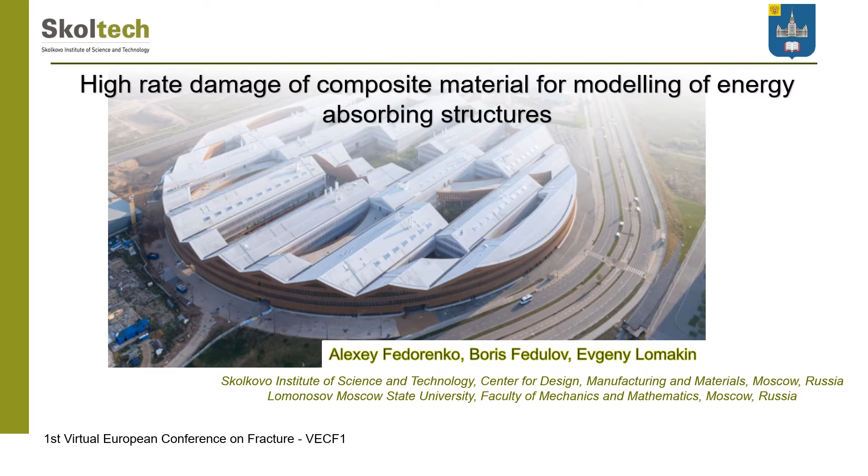It is about high rate damage modeling in composite material. Here is the content of my presentation. First, I start with a brief introduction to examples of composite structures which serve as energy absorbing components in different industrial applications.

Then, since modeling of the crush process is in the focus of this work, a damage model for the case of quasi-static loading will be proposed at first, and then it will be extended to the case of strain rate sensitivity. Then numerical simulation examples of composite tube crushing will be provided. After that, a short section of results, discussion, and conclusion.

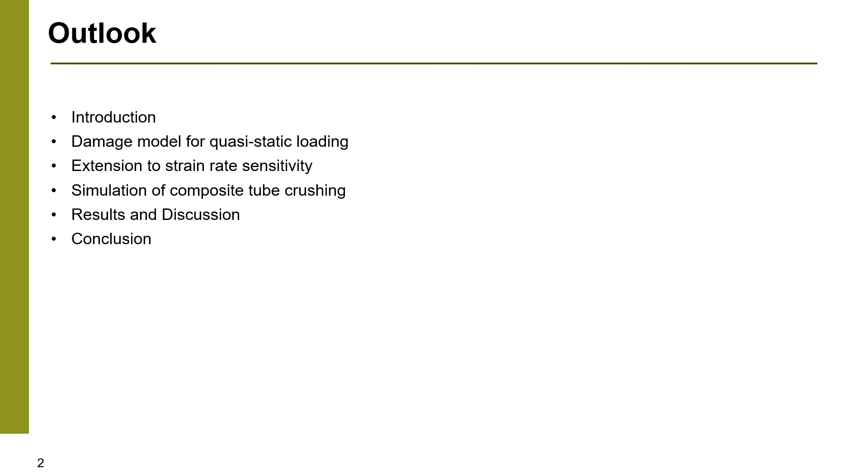First example is a crash tube in the safety system of the seat in a helicopter or airplane, which is aimed during crashing to absorb energy and to reduce overload to the person on the seat. Another example is a special structural element between the cargo crossbeam and lower frame of the airplane with the same goal to reduce overload in case of emergency landing.

Here is a Formula 3 composite nose. This is the entire structure which absorbs energy during collision and also reduces overload to the pilot. To characterize dynamical properties of the material, a special test should be conducted. Here is an example of tubular specimens which are frequently used for material rate characterization.

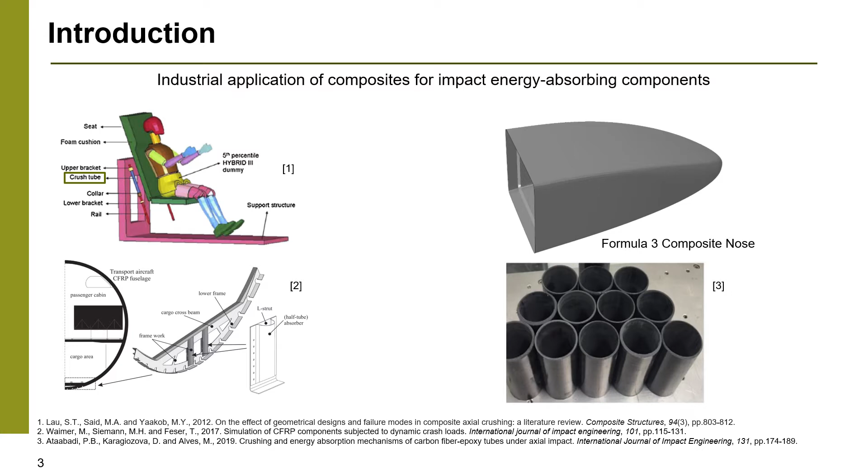Here is a typical experimental setup for strain rate characterization of composite material. It's based on a tubular specimen subjected to impact of a falling mass or fixed to that falling mass. The specimen has a chamfered end, which is important for correct failure initiation. The general characteristics obtained from this test are specific energy absorption, with the meaning of force averaged over crushing distance, and another characteristic is specific crushing stress.

A typical load displacement diagram is presented on the right, so you can estimate the importance of the end chamfer of the specimen. In case of a flat square end without chamfer, the response of the specimen is very stiff, and failure may occur far from the contact with the mass, so the crushing process is not appropriate. Main parameters which we can vary are impact velocities, layup, and chamfer geometry.

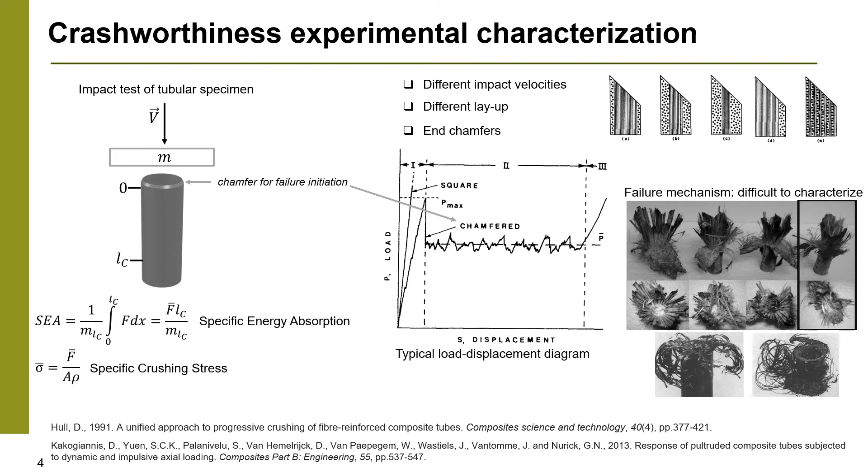Failure mechanism is difficult to characterize, as you can see on these pictures, but some key patterns can be detected, such as cracks, fiber deployment, or crushing to debris of small pieces. A tubular specimen may be considered a structural element. So on the lower level of coupons, a very popular impact experiment is based on the split Hopkinson pressure bar. It records reflected and transmitted strain waves, so strain in the specimen can be determined.

As you can see on the example of test results, transverse and shear loading diagrams are highly nonlinear and rate dependent. They have a significant hardening with rate growth. In fiber direction, the hardening effect is not so meaningful, but ultimate strength growth with impact rate exists. Also, from literature sources, we can conclude that tension properties are not so sensitive to strain rates, so they can be omitted in the analysis.

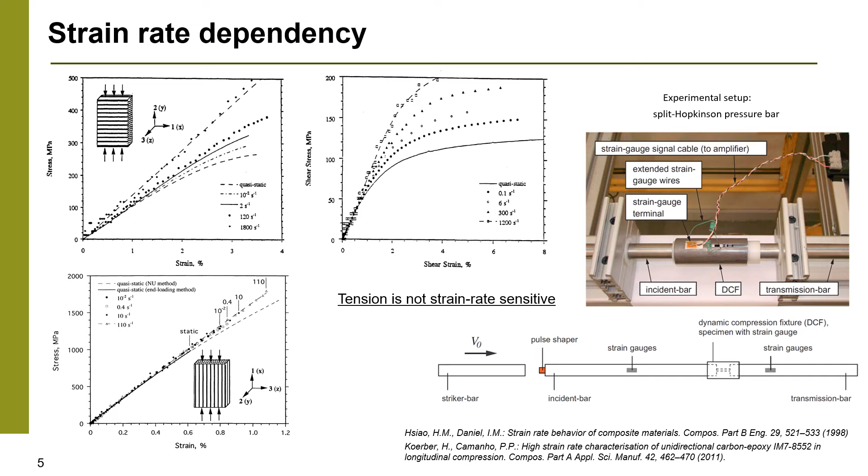This work proposes a model of composite material damage and failure. It's based on the continuum damage mechanics concept. We introduced two damage parameters. Psi1 is associated with fiber failure and Psi2 with matrix failure mode. Damage parameters can be considered as multipliers to elastic constants, and can be interpreted as a degree of material stiffness reduction during damage accumulation.

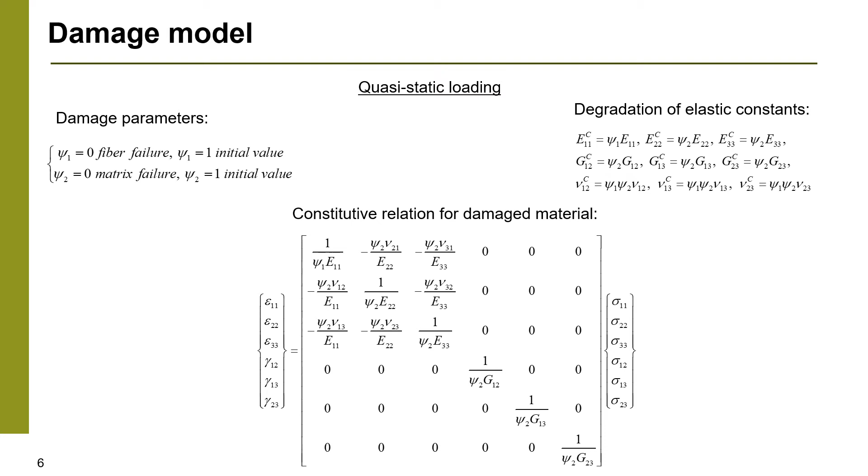Maximum stress failure initiation criterion is chosen for simplicity, and on these diagrams you can see assumptions for the damage constitutive law. For longitudinal load, we reach ultimate stress at point 1 in case of load increase. Then the load suddenly drops down to zero value, which corresponds to failure strain. But in case of unloading at point 2, we reach back to point 3.

Slightly another assumption for transversal load and shear load. So at first we get some stress value at point 1 where damage growth initiates, and then we have a nonlinear part of load, reaching some constant value, and in case of unload we go back to the 0 point.

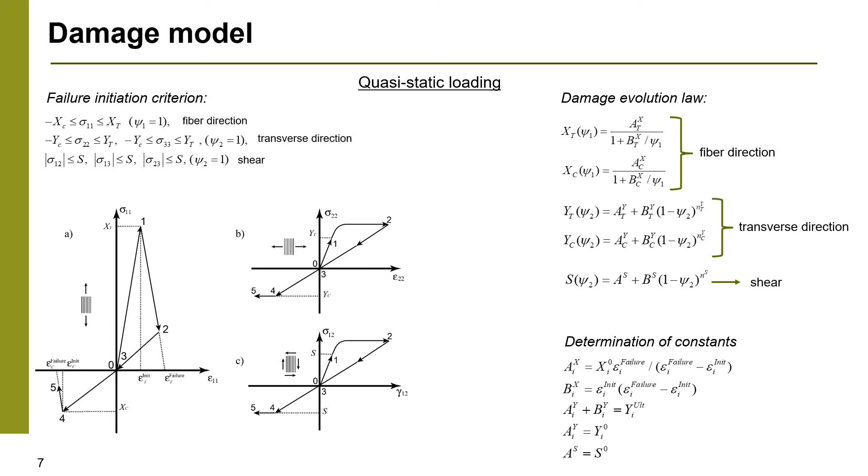To realize this idea, a damage evolution law based on strength dependency on damage parameters is presented, and constants can be easily determined based on strain and stress limit values.

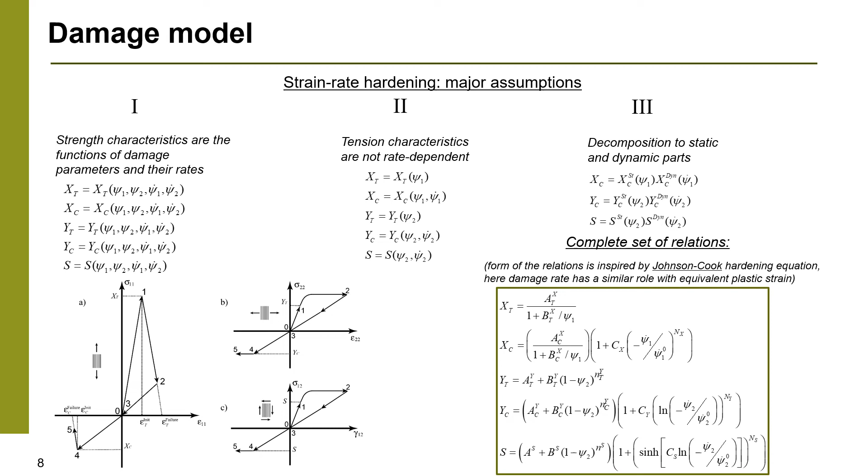Next problem is parameter identification, and it can be resolved using stress-strain diagrams for a set of strain rates. For a particular strain rate, we can write the following equation, which can be transformed to an ordinary differential equation with initial condition of undamaged material, and then we make an initial guess of the parameters, solve the differential equation, and compare with the test curve. If the fit is not satisfying, we vary parameters. So a special procedure is developed in case we need to improve the fit.

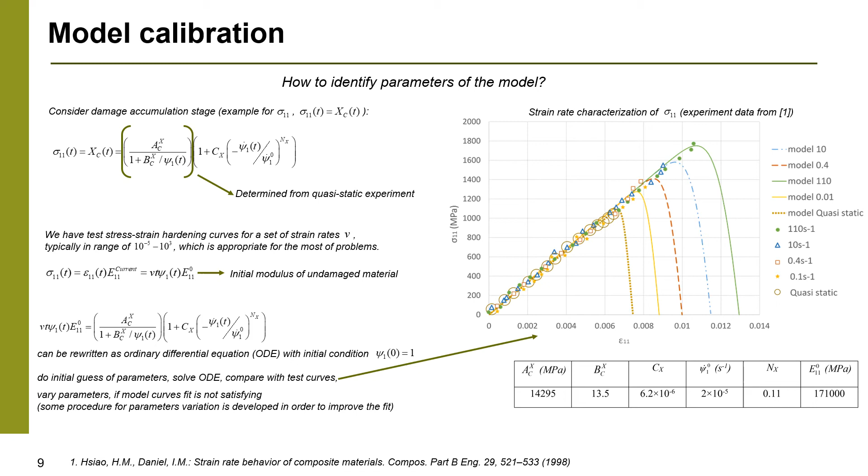On this slide, you can see the procedure of parameter identification for the other two stress components, second and shear stress components, and identified parameters based on solved differential equations.

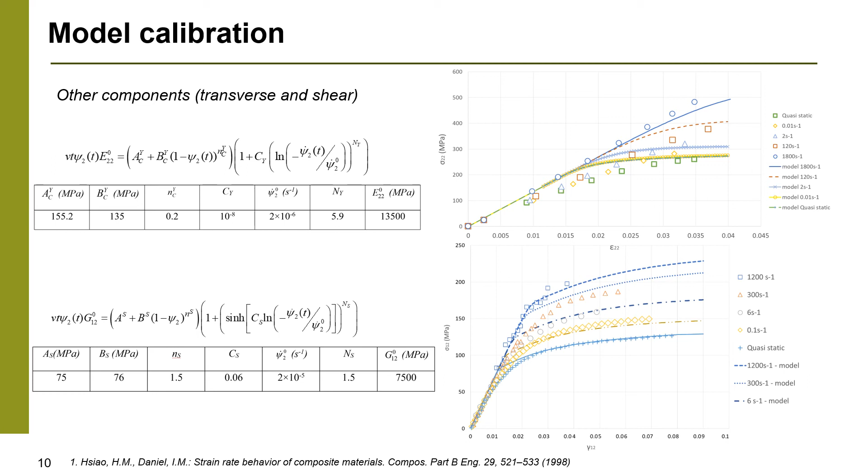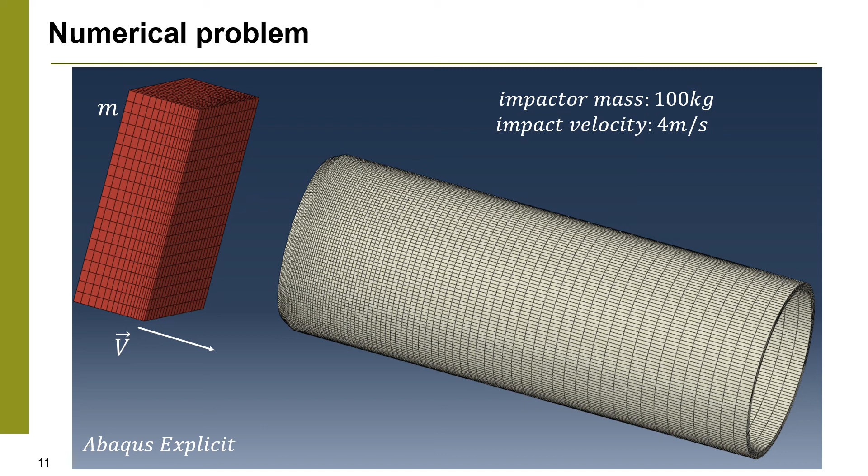Now we consider the problem of numerical simulation of impact to a typical tubular specimen on the basis of the developed material model. It was accomplished with Abaqus Explicit software with an implemented subroutine. Here are elastic properties for the selected problem, the dimensions of the composite tube, and the chamfer zone is selected to be 30 degrees. We use 0 degrees orientation in axial direction and 90 degrees in hoop direction, as shown in the figure. So the ratio between axial and hoop fibers is 1:3.

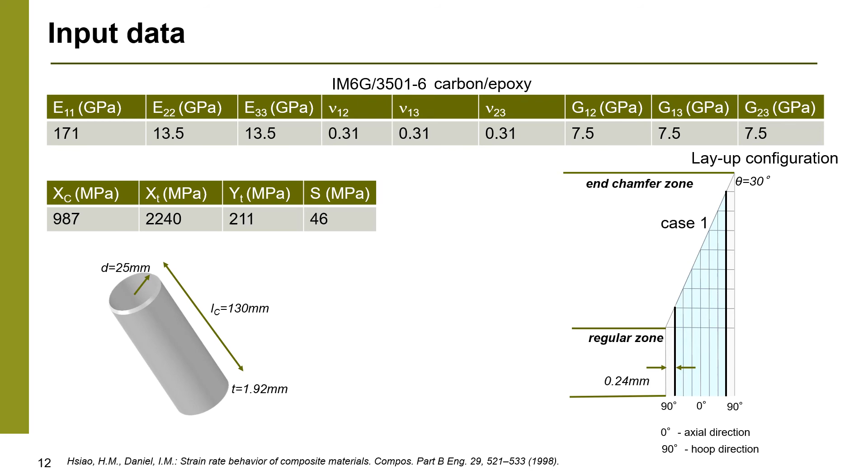This is a simulation of the crush process. Fiber failure is chosen as the element deletion flag. So elements damaged in other modes stay on the picture, and you can observe accumulation of material debris.

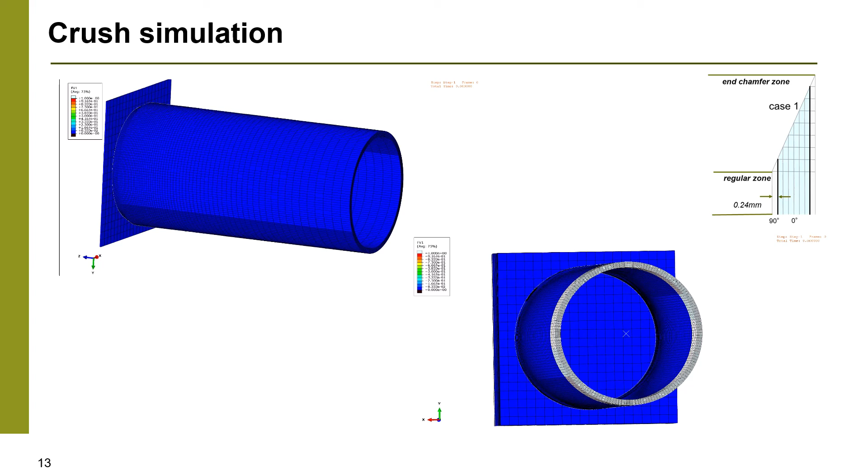On the slide you can find the load versus displacement diagram during the crush process. At the initial stage you can see a sudden drop of the reaction force caused by chamfer failure, and then the stable crush process begins, and we calculate the specific energy absorption characteristic for the first 5 millimeters of the stable crush path and for the second. So if we compare, we can find that on the first pass it is significantly higher than on the second pass.

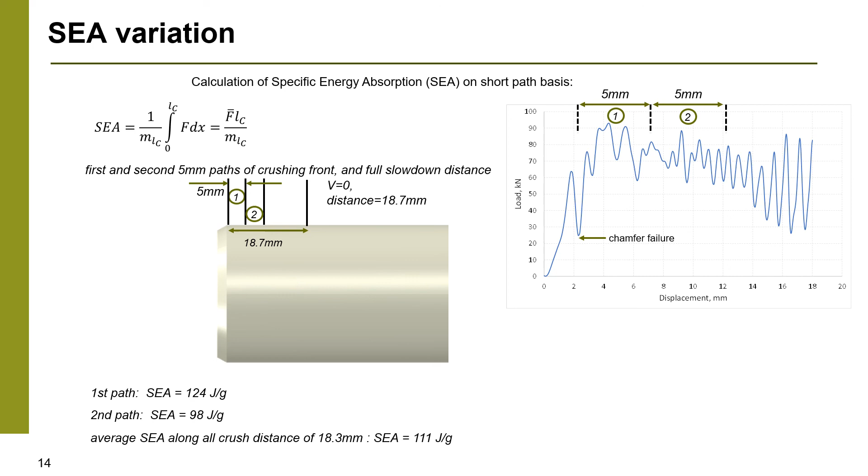Straightforward conclusion is that strain rate dependency should be considered in impact problems. I would like to emphasize that there are some particular materials, particular problems where there is no strain rate dependency, but anyway it should be verified. The proposed model is able to capture strength and hardening dependency on different ranges and types of loading, and numerical simulation of a composite tube impact test was demonstrated. An important result is that crashworthiness varies along tube length, so crashworthiness averaged over tube length may lead to underestimation of reaction force in engineering applications.